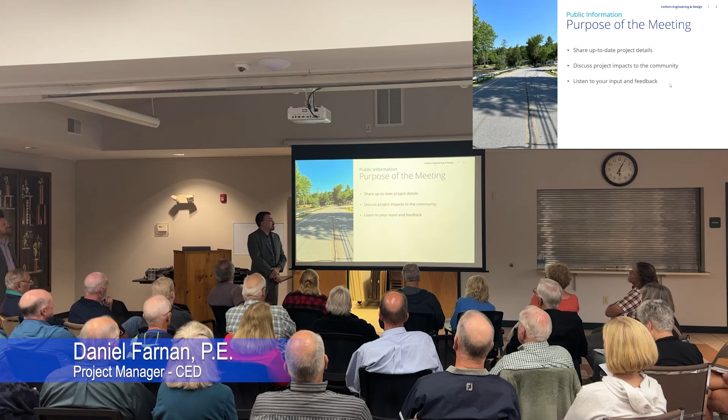So the way that you can be involved: listen to everything that we're able to go through tonight, view the display boards as mentioned, our brochure. If there were not enough copies, we can definitely make sure that it's something that the county has, and maybe it can be posted online with access to it.

Ask questions, and what was mentioned earlier is there is a comment form that you can take. It is a mail-in, but we do have an email address, as Nathan had mentioned, where comments can be issued. Important to note, we are asking for all of our public comments to come in 30 days from now, so October 27th. That allows the public enough time to review the materials.

When it's posted online, we review this presentation. Obviously, you're going to have what you learned tonight, the conversation that happens tomorrow, the conversation that happens in a week, more questions that come up. The comment period is open for you to register those comments or questions until October 27th.

So our project schedule. Colliers came into the project in March of this year.

Prior to that, what I will just explain is that there is a process of obtaining the funding, understanding the need for the project, programming that, and obtaining the funding. The county did all of that work with local input and all the processes they have for asset management, understanding bridges they own and what conditions they are in. They went through that process, obtained the funding, and then they came out and hired an engineering firm. And that is us, Colliers.

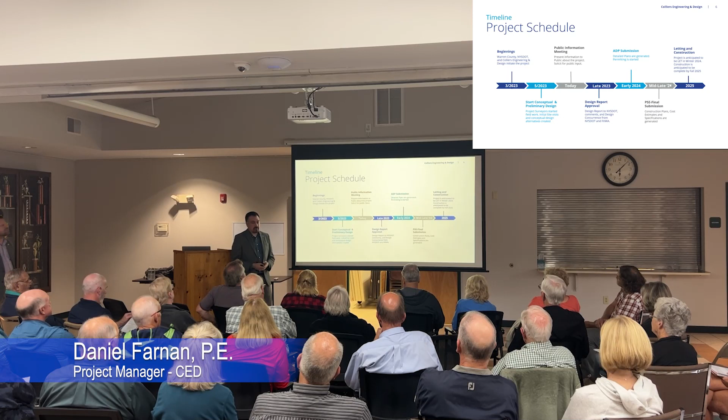The next step, as I mentioned earlier, is a design report. We take all of the information, all of the environmental information, the comments we get tonight, my analysis on what these bridges might cost, and the different options that we have. We put it all together in a report. It goes through a review process, and we get a design approval.

We're going to pick with that report which bridge design will be progressed and built at each of these sites. That process is going to take place with the remaining months of the year, and by early 2024, we begin the process.

It's abbreviated ADP, Advanced Detailed Plans. That is the design phase. We're going to actually design the bridges, draw all of the plans, and come up with what will eventually be constructed.

In mid to late 2024, we will get to the point where we finalize our design. That's called the PS&E phase. It is essentially just construction plans and getting ready to select a contractor so the project can be put into construction late 2024 and then through all of 2025.

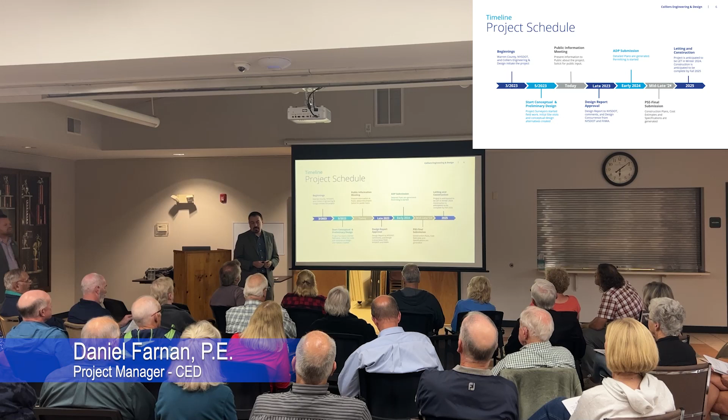One thing I'll say about projects like this is our best forecast for the schedule as of today. Things can definitely change as we go through the process. This is where we believe we're going to end up, and that construction would end in 2025. There are some things that can change that, and the reason for me not being specific on the months is because I don't want to pin down a day knowing that it can be pretty fluid. But that is our goal.

Why are the projects needed? So if we take a look at our first bridge, on Adirondack or East Shore Drive, County Route 15.

The bridge is approximately 90 years old, and the concrete is cracking and spalling, basically deteriorating. The arches underneath, for anybody who has gone underneath the bridge, there are arches you would see above your head. They are in very poor condition, corroded, rusting away.

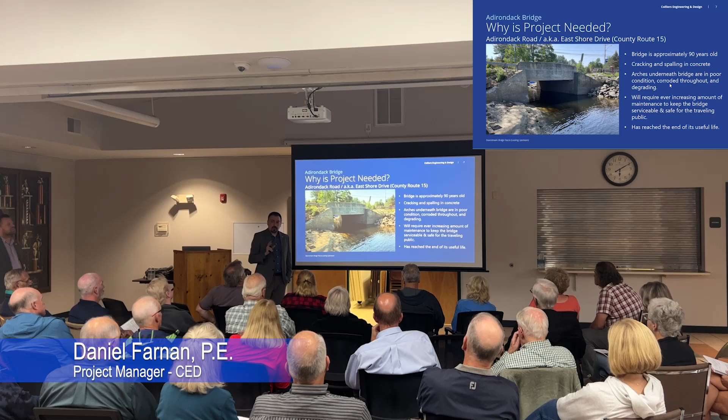It's degrading. So as the county looks at their assets, they realize that as this bridge continues to be in service, it will continuously cost more money and have the need for larger repairs. All of that weighted together, the bridge is basically at the end of its useful life. And 90 years out of a bridge is definitely a good time. It's time to retire it and have something that will do that.

The second bridge, being called Beaver Pond Bridge, on Johnson Road. This bridge is a little younger, just shy of 60 years. Its construction is timber, not concrete like the other bridge, and it is in poor condition. There's a lot of decay. If anybody has taken a quick look at some of the areas underneath, essentially there's rot in the wood.

One thing that has occurred with this particular bridge in our industry is called flags. The bridge has been flagged for the need for immediate attention occasionally. When that starts to happen, what I like to use as an analogy is it's like an old car that constantly needs to go into the shop. Eventually, it just becomes time to get a new one after you keep having to bring it in. Same thing here with this bridge. It's reached the end of its useful life and it's time for replacement.

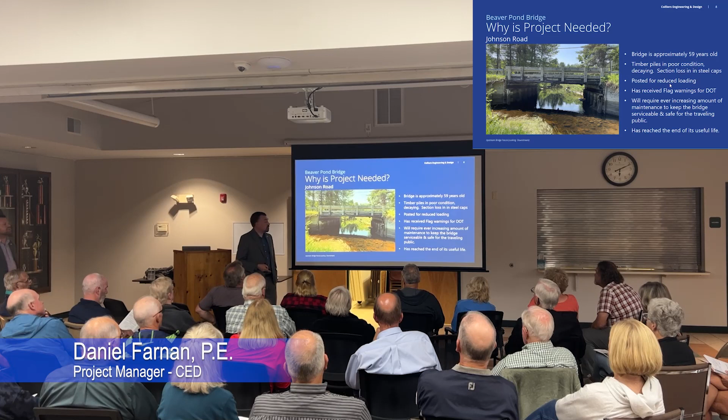So what we do when we go through bridge alternatives, understanding what we're going to choose for potential design, the first is evaluation of the bridges and whether they can be rehabbed or if they have to be replaced. Both of these bridges are going to be replaced. When they get replaced, we look for a design that will last for at least 75 years.

We are required to look at the water flow underneath each of the bridges, and there's criteria we must meet for all of the different storms that could occur, all of the water and flooding that can go under the bridges. That criteria is set by DOT, and that dictates how big the bridge has to be. We call it span, how big the opening underneath that bridge is going to be. So we determine what that is, and then that helps us figure out which structure we're going to pick.

We have geometric standards, safety standards, so that's basically just the width of the road. Currently, the travel lanes, the lanes that traffic goes up and down, are 11 feet wide, and what we are required to have is, on each side of the travel lanes, a 5 foot wide shoulder for pedestrians, cyclists, and also for emergency needs, should cars have to get over for a first responder passing by.

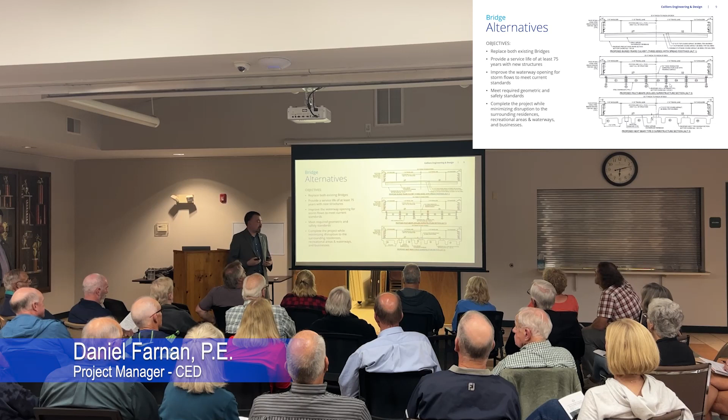So our preferred alternative, starting with the Adirondack Bridge, this is the bridge by the lake with the marina back here. What we have chosen is called a galvanized steel multi-beam structure. Basically you can think of a steel beam, an I-beam, multiple I-beams spanning the stream.

On top of that is a concrete deck, so the road is concrete over the bridge. On each side of the bridge there's an extension of that concrete called an approach that extends about 20 feet or so.

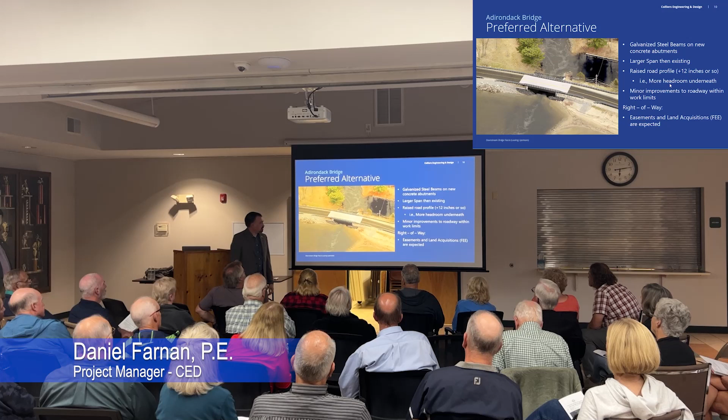With this bridge, as I explained, we are increasing the span, and that is a requirement from DOT criteria. We are also going to raise the road profile, meaning the road is coming up in elevation, and underneath the bridge is also coming up in elevation. There's a lot of things at play.

For everybody interested in knowing how much more headroom there is under that bridge, approximately 12 inches. That is when the lake is at its normal level. Obviously there's fluctuation in that level, so you don't exactly see it.

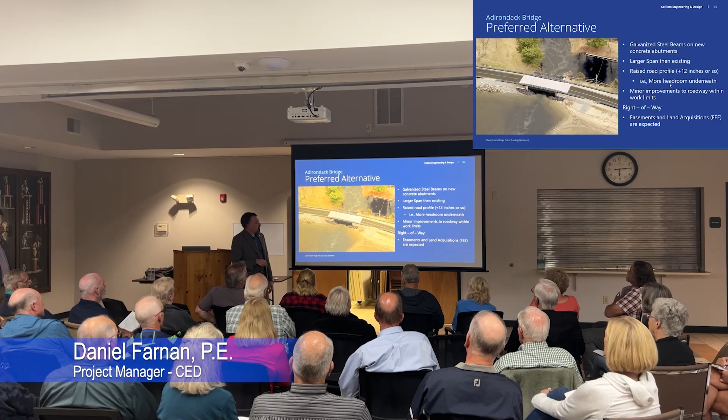From the existing condition, it will probably be about 12 inches higher. There'll be minor improvements elsewhere along the road, and on each side we'll be repaving. And then an item I'll bring up right away is easements and acquisitions.

The next slide here—and these boards are at the back of the room if anybody needs to take a quicker look—this is looking down on the project at Adirondack Bridge. Obviously the bridge here, and the extents of the road that will be repaved. What I want to draw your attention to are the green and red lines.

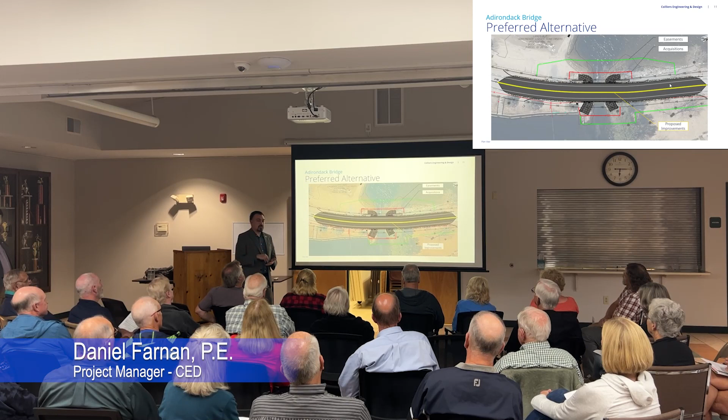The green line is a proposed easement, a temporary easement that will allow on both sides of the bridge the contractor to access that area so they can successfully construct the bridge. The red line is what we are proposing as a permanent acquisition, a land transaction needed so that the entirety of the bridge is within land controlled by the county, so they are always able to maintain it and access it in the future.

Second bridge, Beaver Pond Bridge on Johnson Road. The design is the exact same, the galvanized steel multi-beam structure. It will also have a concrete deck, and the span is increased from existing.

This project also raises the elevation of the road as it goes over, though not necessarily for the same reasons. This has more to do with the water criteria for passing water safely under the bridge without the risk of it ever overtopping.

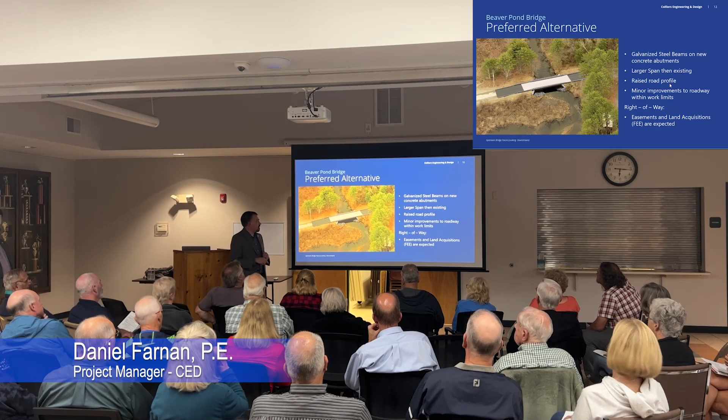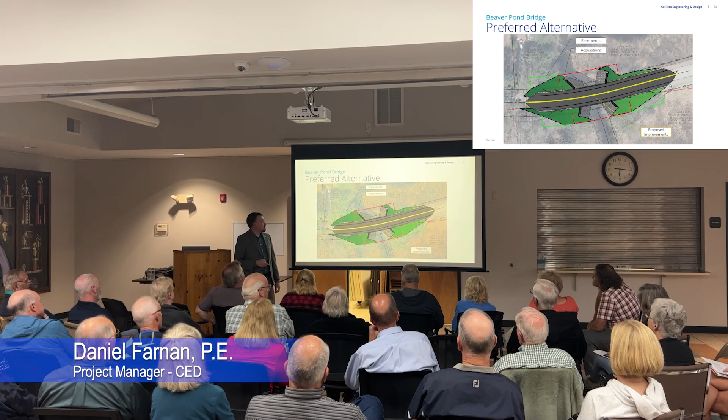There will be minor improvements on each side of the road, and then right of way considerations. Again, the same style map showing proposed conditions: the green lines being a temporary easement for access during construction, and the red line being a permanent acquisition, again so the county can always access and maintain the structure.

Detours. During construction the bridges will be closed—they have to be, since they must be demolished and the new one built. So that area of the road will definitely be closed. When we talk about detours, these are official routes, and they have to be on roads where all traffic, truck traffic included, can safely go through. We don't usually pick side roads or smaller local roads; we pick roads that have the capacity for large trucks.

For the Adirondack Bridge, when it's closed, the official detour as planned would be: if you were on the bridge heading south, you'd stay on County Route 15 until County Route 64, East Schroon River Road, come down to Valentine Pond, which is County Route 55, then back up to Johnson and around. That's because it has to support truck traffic.

We are fully aware that Shaw Hill Road is here, and we also know there's another cut here. We anticipate local traffic will go the way they know. So even if the official sign points elsewhere, these roads are always open and accessible, and anybody local will obviously know which way to go around.

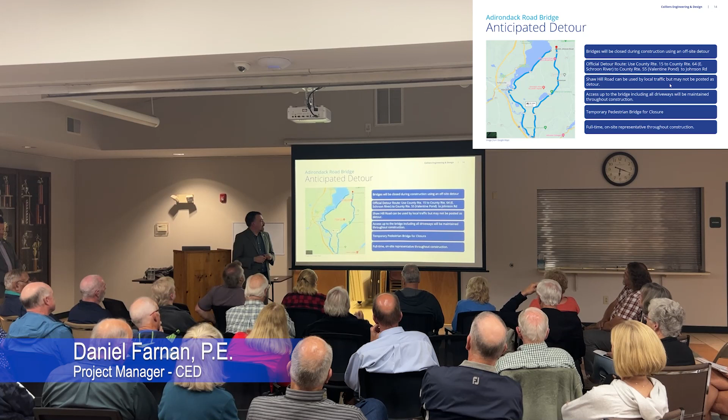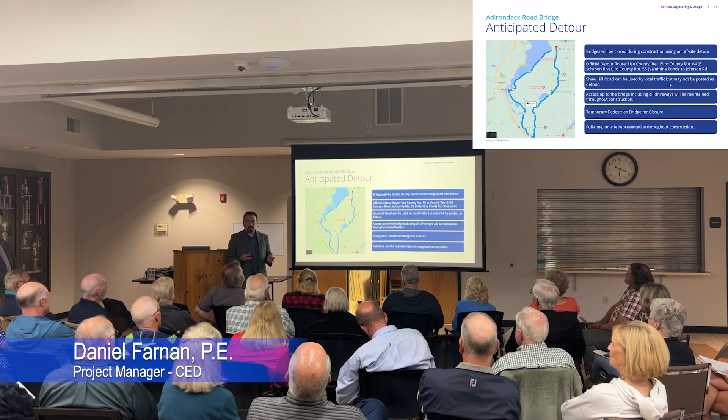During construction, we always have inspectors there. There will be an individual representing the county, and they can be made aware of any issues, which will be reported up to the county. So there's always going to be somebody there in case the public sees something of issue, especially when it comes to traffic.

For the Beaver Pond Bridge on Johnson Road, there's a smaller detour, starting from the bridge, coming over to Valentine Pond, coming back over to, I don't know if that's correct as labeled County Route 15 per Google, but it's basically coming back over here to Johnson Road right now.

I wanted to mention it is possible both bridges will be closed at the same time. It is possible they will be staged, one and then the other. They may be on and off. I want the public to definitely understand that those two things could happen - the bridges could both be closed at the exact same time.

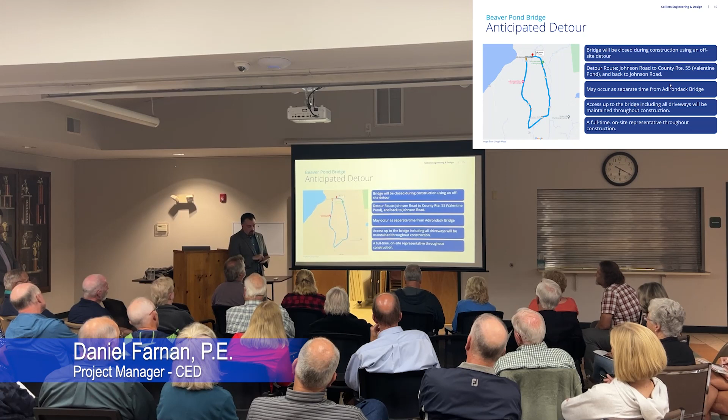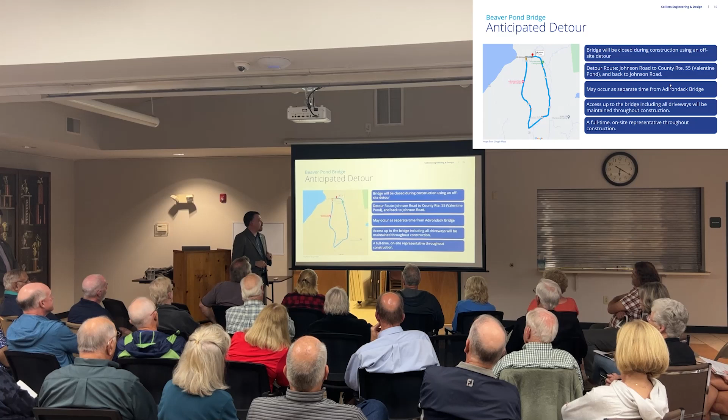At this point in our project, it's hard for us to predict the exact way it will be done - what we call means and methods that the contractor will have. When the contractor is selected, they'll be able to customize their detours a little bit. This is what we're proposing right now; there may be some change and the exact staging could change, but this is where we're at for this point in time. And again, there's always a representative of the county on site during construction in case there's an issue.

Last topic is the cost. As of right now, we're anticipating the total construction cost of the bridges will land somewhere between $3.25 to $3.5 million. There is construction admin and construction inspection costs that go along with that, approximately $630,000 for our current estimate. That involves all the inspectors that will be there, and all the materials that get tested to make sure this is properly built.

The way the overall funding is broken down: 80% of this is covered by the federal government through FHWA, 15% is covered by the New York State DOT, and 5% is covered by the county.

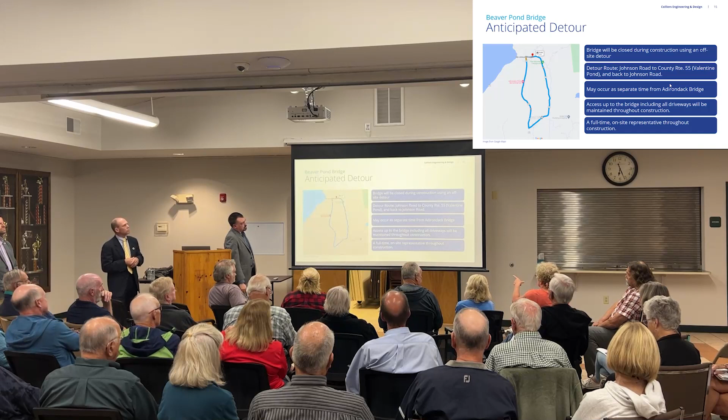Kathy Hill, I live between the two bridges, right in Adirondack, between the general store and the lake. You had a map up, and it showed East Shore Drive, Valentine Pond Road, and Johnson Road, and it was talking about these roads. The one before that, I think, Dan, right? Yeah, yep.

So how do we who live there know where your construction vehicles are going to go? Are they going to come up East Shore Drive exclusively to that bridge? Are they going to come up Valentine Pond Road to both bridges? Are they going to use Johnson Road? Johnson Road was recently blacktopped.

I'll take it if you want. You're more than welcome to. So, Dan had talked about it earlier, saying we don't typically dictate the means or methods of the contractor.

We can tell them to some degree in the plans and specs where we want you to travel, but I don't think we're at that stage yet. If somebody's coming from the north, it may be Valentine Pond or East Shore, I don't know. It'll depend on where the contractor's coming from, and where he stages his vehicles at the construction sites will be within those easement or right-of-way areas that were the concern. I was wondering if there would be a directive for where they travel.

As Dan explained, and it's on the bottom of this slide, there will always be full-time on-site inspection. One reason is to make sure the contractor's doing the bridge correctly and that we, as the county sponsor, get what we're paying for. The second is to make sure all the residents are satisfied. If there are any questions during construction, that person will be there to answer them.

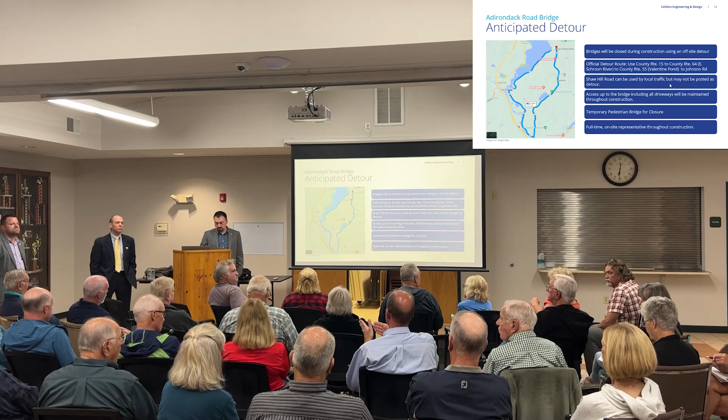One question I did have is whether any thought was given to reconstructing the bridges so that half of the bridge could be built at one time while maintaining vehicular traffic, as was done with some bridges reconstructed near Keene after the flooding occurred. That's the first question. The other is more of a concern — there's a satellite fire station in the town of Horicon, just past the Adirondack General Store.

I am a little concerned about fire protection for people who are on the other side of that bridge, because then the fire department would have to come all the way from Brant Lake down here.

I'll let them take the first one, so for the second one, typically what we would do is reach out to the fire departments and try to get them to stage their equipment on the other side. If the pedestrian bridge is there, it's a matter of getting to the bridge and across to get their equipment in. That's typically one of the things we'll always do, reach out to emergency services. As far as doing staged construction on a bridge, certain bridges you can do that, and others you can't.

I'll let Dan go into the explanation on that one.

It's part of the analysis, looking at the types of designs we can do. These sections, just so everyone understands what they're looking at, if you took the road and thought of it like a sandwich, cut the sandwich in half, picked it up and looked at what's inside, that's what you're seeing here. This is the road over the bridge, cut in half, picked up, to see what that road looks like. These are different sections we used in our design, coming up with the best option.

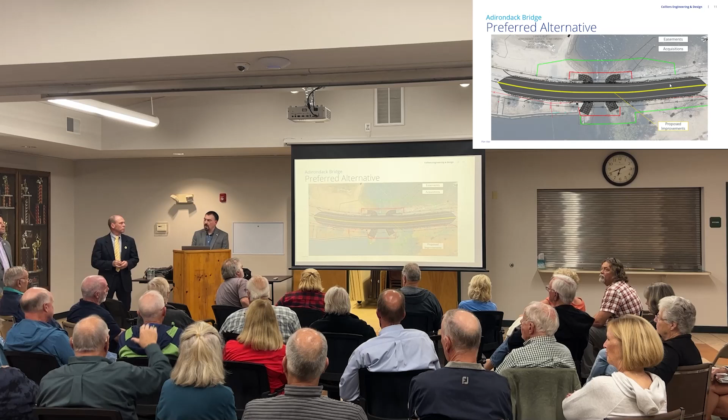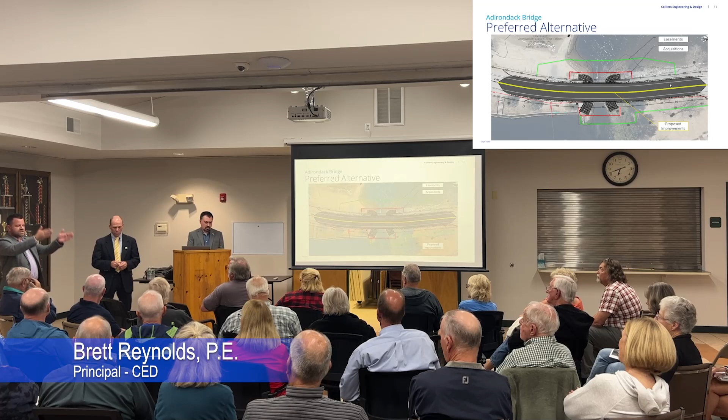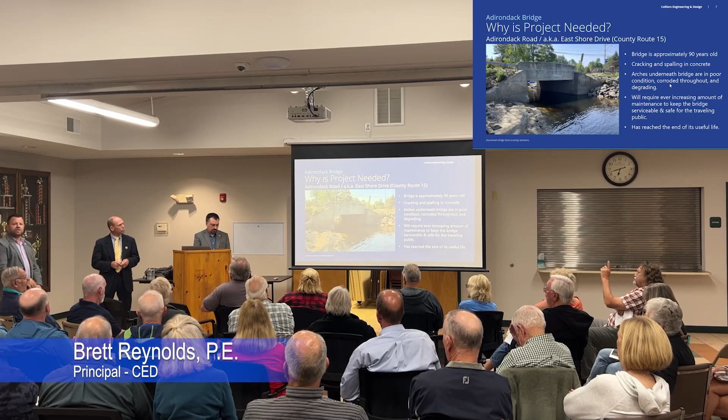Yep, so the existing abutment we're going to leave so that we don't destabilize the existing ground. The existing bridge stems above the water and the footing below grade are on timber piles, so we don't want to destabilize that area. We'll put riprap and stabilize what we can, but anything more would destabilize that local area. So one of the things we're going to do is cut the existing abutments down to the thread of the stream area and build up from there. There will be construction debris, but the abutments will be chopped down to a specific elevation so that they're clear.

The flow of the water is what I was concerned with, because we do have boats going under there, so I wanted to make sure there's not big rocks or anything like that. There is a floor under that bridge. During construction, our inspector will be out there, and based on the permits and things with DEC, if they see something down there while doing construction, our inspector will tell them to pull it out. As Brett said, the abutments will be cut off at the bottom, and then slope up from where they are today.

They're going to slope up, around 2-on-1, from that point up to where they would meet the roadway again.

The span is going to be longer. The channel will remain the same, except it will slope up from where it is now. The best way I can explain it: if this is the bottom of the wall that will be left in place, from that point the span now is going to be further out, so it'll slope up from there. Technically the base or the bottom is not getting wider, but as you come up, it does get wider.

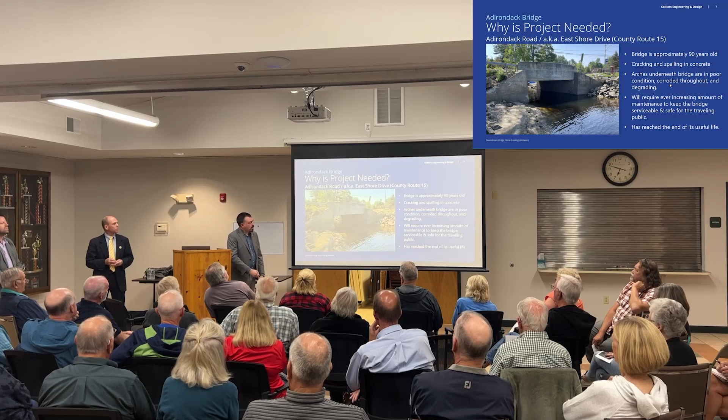Oh, I see what you're saying - you mean the structure on the bottom looking flat versus... Yep, to be clear, I'll bring this up. The option we are choosing is the middle option, which right now is the preferred alternative. There's space in between each of these beams - if you follow the line across the bottom of each beam, it's roughly a straight line. This other option we looked at would have given that straight line you're thinking of. With this one, there are openings in between each of the beams, and the bottom of the beam is the lowest point.

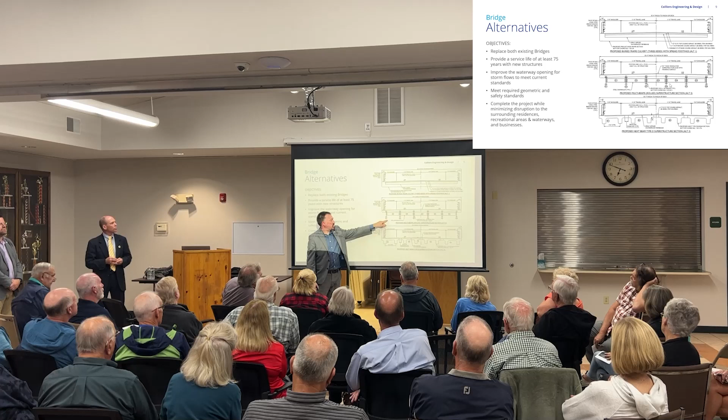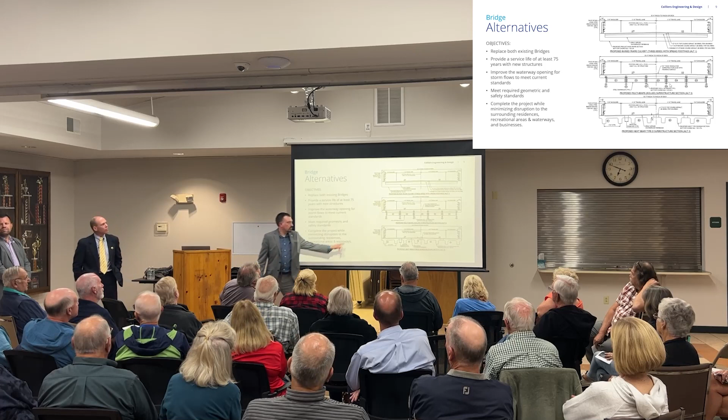That's the point when we're talking about approximately 12 inches higher. So if we drew what the existing would look like, that low area of the existing would be here, and 12 inches higher is that first flange. So with the beams, the space in between gives more headroom, but you'd hit your head on that first flange - so 12 inches.

Okay, thank you. Yes, sorry, three hands came up, I did see you first, yes, please.

I'm Tom Luciano, Chairman of the Park District, and what I'd like to ask is, is there a possibility that the involvement on the bridge could be marked for waterway? We're trying to do that around the way, and there's always been a problem in Adirondack.

If we put it in, we have to take it out in the fall or winter because of the ice and everything else. The other places we put around the lake, we haven't had to do that. So my question is, in the concrete, can we get a marker that's going to last 50, 100 years? We don't have to pull that anymore.

Tom, we're not in the boat business, but what I would propose is, after we're done, if you guys want to come to us after the fact and say we'd like to put markings on there, we're not opposed to it, but I'm not going to do something during construction.

Is there a possibility, instead of drilling into concrete and worrying about ice getting into it and breaking it apart, is there any type of fastener that maybe you put in the abutment so we can do that? We'll talk about that, yeah, we'll look at it, I'll certainly look at it.

I understand about the watermarks, but most of the watermarks put in certain areas aren't done by the county. Right, you guys do them, Soil and Water does them, DEC does them, we typically don't put those in, but I'm not saying we can't, we'll have to look at it and determine what we would use.

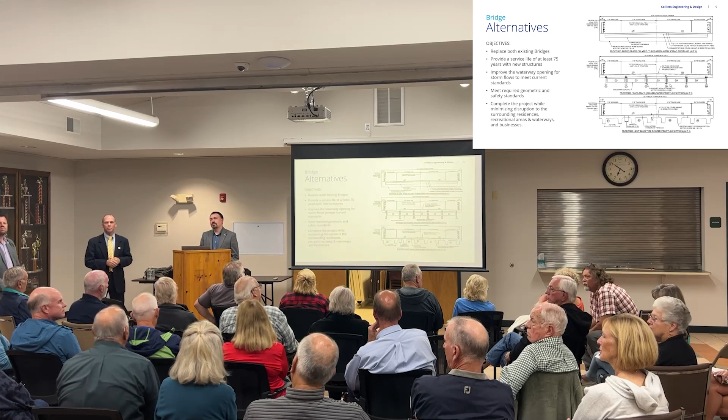Okay, three hands, go ahead, and then I'll come back to these. Going back to the schedule, most likely at this time - I know it's probably swags at this stage of the game - what can we expect in the Adirondack lodges, because you said you don't want us to go out with boats during the construction or demolition and construction phase?

Give us an idea of what that could be. In other words, if you started, and you don't have a start date yet, but if you started in '24, this month, that means it would be almost a whole year from there before boating would resume.

Well, I'll refer to Macon, because we started the Dippikill Bridge last fall, and they didn't have pavement down, but when did they finally open it up? In June? So it took from fall through the winter months, we allowed them to demolish it. They probably had stream restrictions they were up against with DEC, so they had to pull out of the stream, and then in June we opened it up.

They didn't have it paved yet, so how many months were they off in the winter? A couple months, three months? They didn't go back in until late April, early May to start work. And in-stream, the DEC's in-stream restrictions are the parameters we work with - it's the 15th of May to the 30th of September.